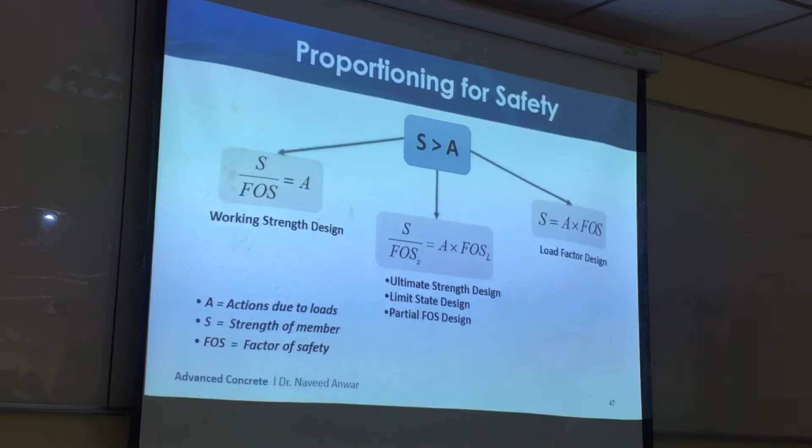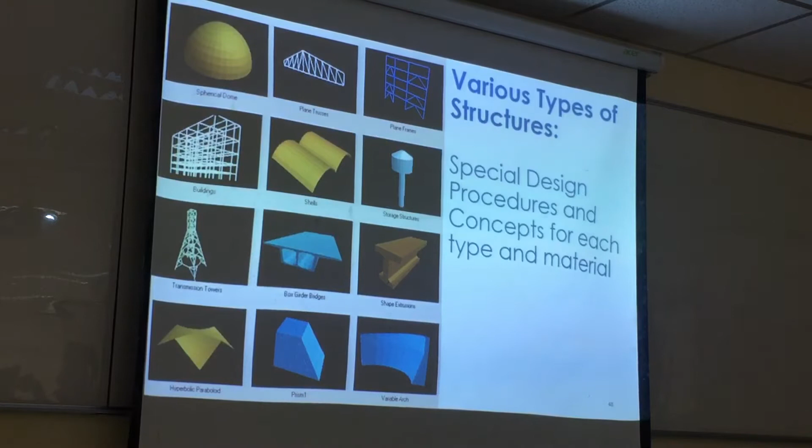Estimating the capacity we can now do better, and this course is about estimating capacity. So we are going to concentrate on this side of the equation, strength. Action will be the next course. These are the structures that you are supposed to handle when you go to the structural design office. So this knowledge should be sufficient to do that. So let's look at the structural design process.

Structural design is the process of proportioning the structure to safely resist applied forces in the most cost-effective and friendly manner. This is kind of my definition of structural design. So if you look at this definition, it has too many things in it. Very simple sentence, but many problems there. First of all, proportioning the structure. What does it mean? If you look at each word, you will find a deeper meaning.

Proportioning the structure. Not only dimensioning, but putting the members. How many columns will I need in this room? Where to place them? So it's also placing the members in the right way. Should I use a 5 meter grid or 10 meter grid or 7 meter grid? Should I use steel structure or concrete? So the whole concept of developing the structural system comes under proportioning. Type, spacing, size, direction, so many things.

So structural proportioning is a very complicated task. You need expertise, you need experience. Am I going to use a frame structure here, or a shear wall structure? Flat slab or beam slab? These questions are never ending. What system should we use? And that part is called proportioning. And then estimating the dimensions to start with, and then finalizing the sizes. So your major task is going to be proportioning of the structures.

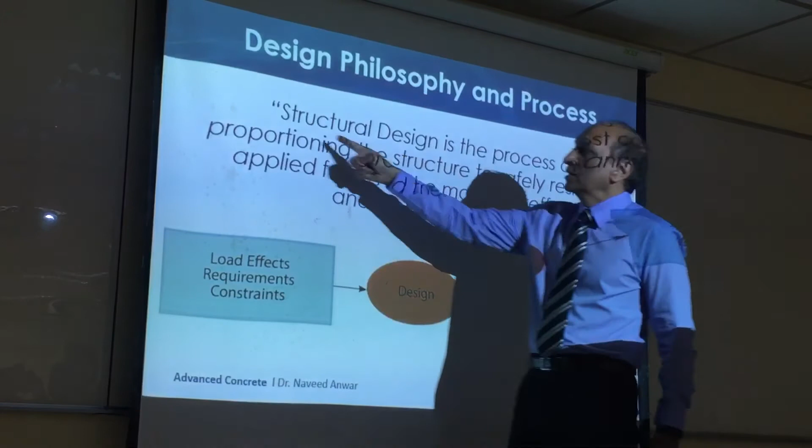Selecting the material type, selecting the material strength, selecting the column sizes, selecting the reinforcement amount, selecting the pattern of reinforcement. How many bars will I put here? This way or that way? Which diameter? Am I going to put stirrups or not? So your questions are never ending, and all are related to proportioning.

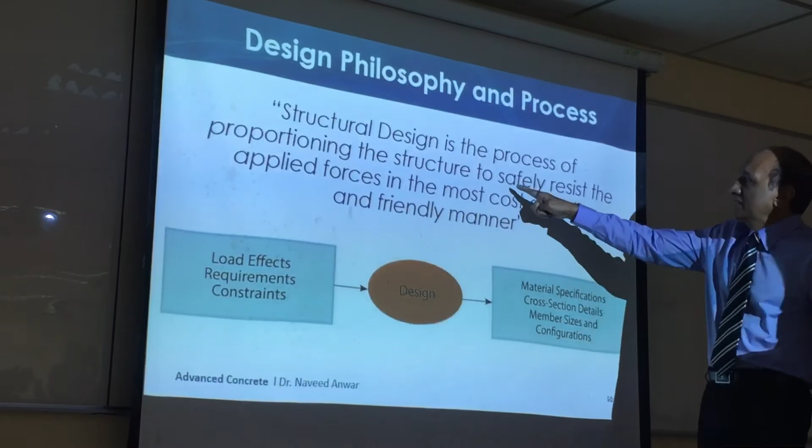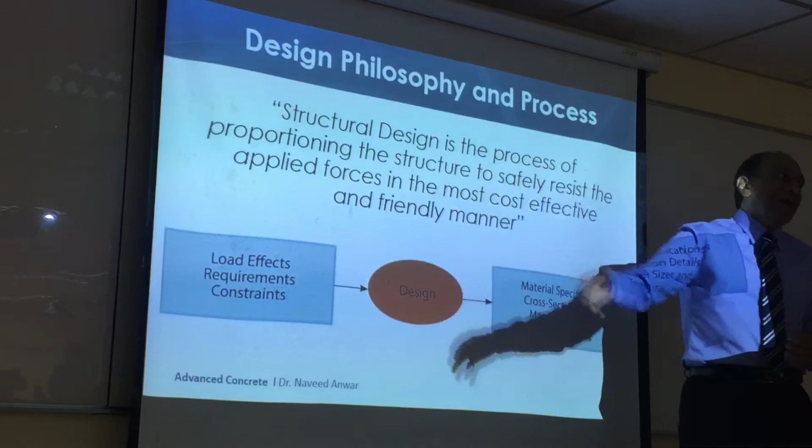And then why? To safely resist the applied forces, because we want safety. We don't want it falling down. People rely on us for safety, right? Engineered buildings are supposed to not fall down. So we need to make sure that we are able to calculate the capacity and the action and apply that equation. So first you proportion, then you estimate the load, then the action, then you calculate capacity, then you compare them and make sure that your structure is safe.

Most cost-effective manner. You cannot make something which is very expensive. Nobody will want it, right? Making it safe and too expensive, not good. You have to make it practical. You have to make it cost-effective. You must make it at a reasonable cost so people can construct it.

And friendly manner. What is friendly? Yes, environment friendly, comfort friendly, architectural conformance. Many meanings of friendly, right? And it should be aesthetically good also. Friendly for construction, for living, for environment, for eyes, for maintenance, for decommissioning, for operation. You should not make something that cannot be used effectively. So this is the definition of structural design.

So when you do that, you must take care of everything. But most of the time, engineers only worry about safety. So they come up with structures which are very expensive, or look very ugly, or have too many columns, because that's what they are taught. But structure is more than that. Structure is part of a system doing some function, so it must not interfere with the function. So please remember this definition when you become a structural engineer. You are a structural engineer, right? You already graduated.

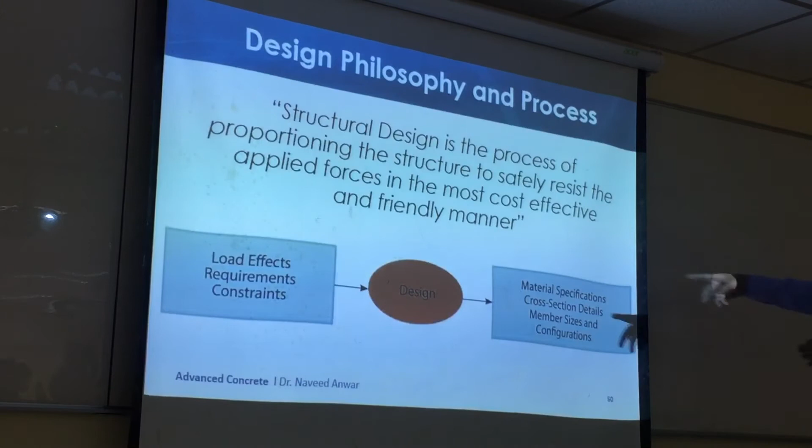A lot of engineers fight with the architects. They say, oh, no, I cannot do this because it doesn't follow the code. And what happens? The architects fire the engineer and they find another one who can do that. So never say no to an architect or a client. If they want something, say, yes, I can do it. Just give me whatever you want. Right? So never say no. Yes, we can do it. And then find a way to do it. And this design process is finding a way to do it.

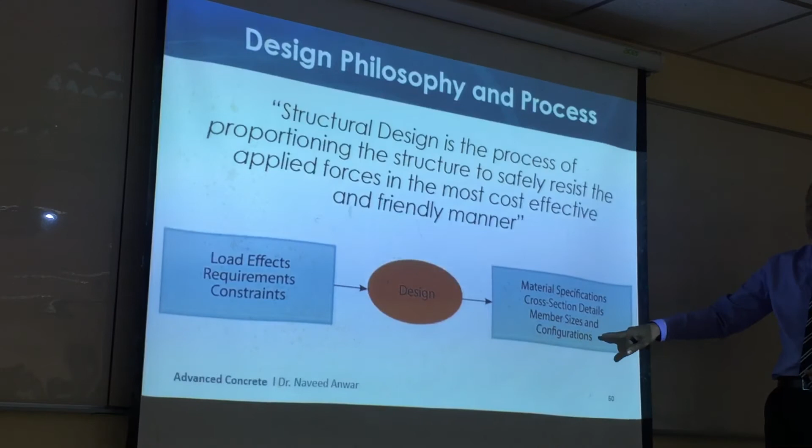In this process, you find a way to satisfy load effects, requirements, and constraints, put them together, go through the design process, and come out with material specifications, cross-section details, member sizes, and configuration, proportioning, which is everything.

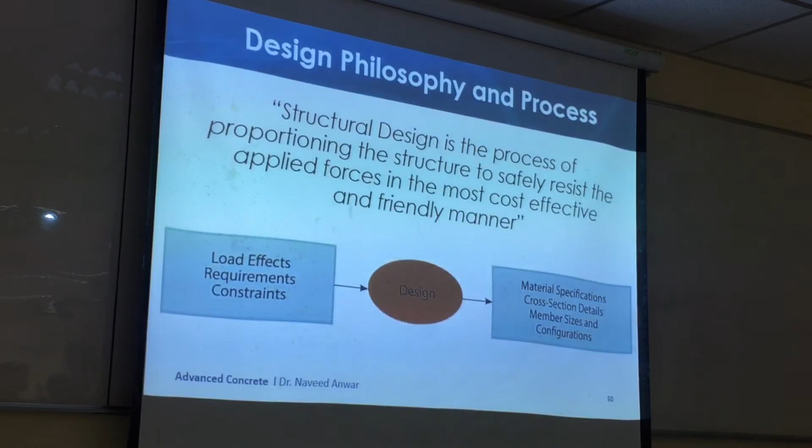So if somebody says, I want to have only one column which should support a 100-story building, you say, okay, sure, why not? I will design it for you. Give me a concrete which has a strength of 1,000,000 psi. If they cannot give that, you say, okay, not my fault. I designed this column for concrete with 1,000,000 psi. You cannot give me that. Not my problem. Bring me a material which has those properties, right? So my point is that you can always specify a material needed for something. If they cannot produce this, it's their fault, not yours, right?

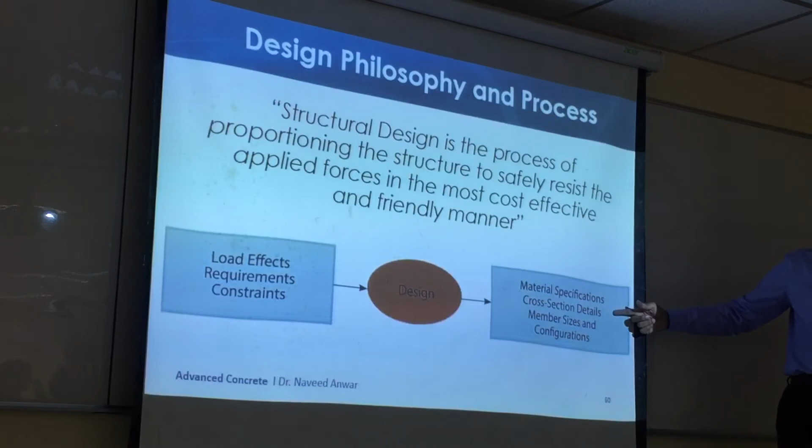Cross-section details, same is the case. Many times we get into a situation when the column size is restricted, we say, okay, we want to make it in steel and fill it with concrete, and then fill it with bars, and fill it with whatever. And if they really want it, they do it. If they say, oh, it's not, then we say, okay, make it bigger. So my point is that you should always have a solution for a problem. Then member sizes and configuration, how to arrange it. So this is the overall structural design process. Everything is within this slide, right? Anything that you think is not covered here, please tell me. Good.

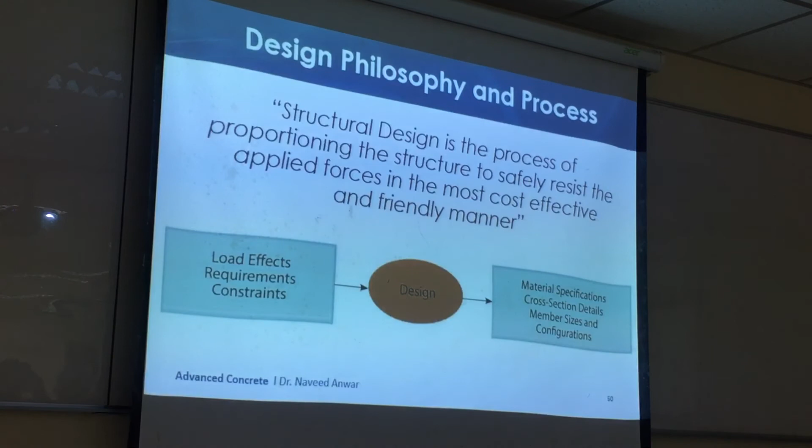So normally this whole thing, design, is carried out in these steps: conception, modeling, analysis, design, detailing, drafting, costing. That is the logical way we go. Conception means you make a concept, how you're going to do these things, the system development. Then you model it. Modeling means, as I told you on Wednesday, structure is too complicated, you need to create a model around that, simplify it. So a model is a simplified representation of the structure. You represent the structure, your concept and model, then you do the analysis. You take a computer program, you put this model inside, you run it, you get the response.

Then you design it. Remember designing, reinforcement, sizes, all of that. Detailing, how the reinforcement will be laid. 2 layers, 3 layers, spacing. What is the bend? What is the splice? Things like that. How it will be constructed. Drafting. Then somebody has to make a drawing.

You know, in America, in most places, the salary of a structural engineer and a draftsman is the same. So a lot of companies employ structural engineers to make the drawings also, because draft person and engineer have the same salary. So it's much better for the engineers to do that. So people have to learn drafting or detailing also in many countries. And then costing. Finally, you also have to do costing.

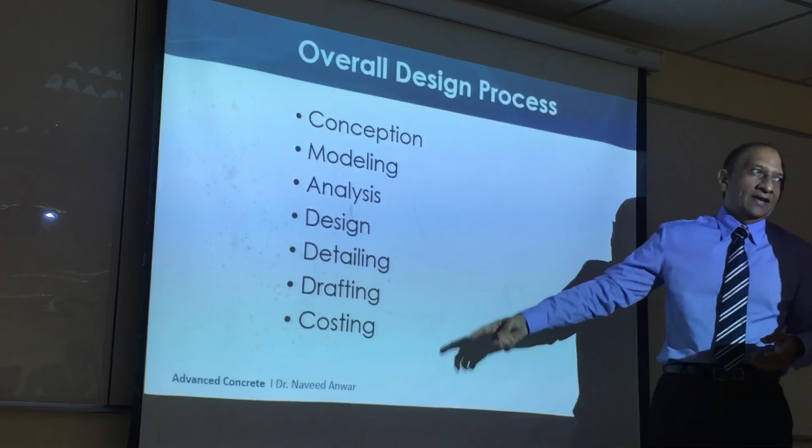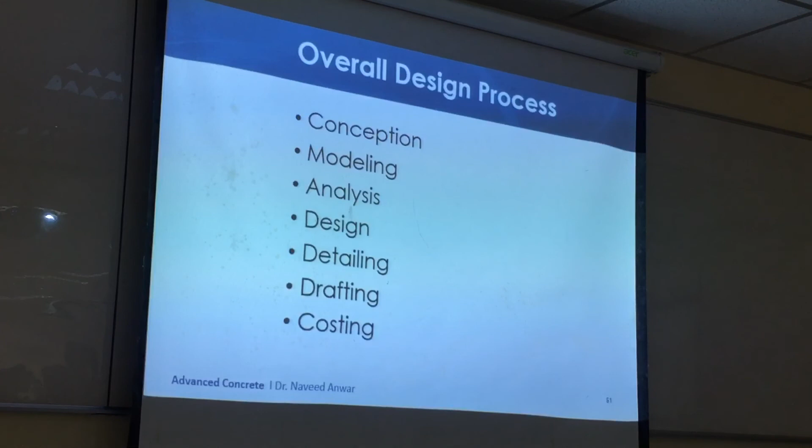But the problem is, this step-by-step thing never works in the real world. Because the client comes in and he says, okay, I have a building I want to make here. What is the cost of that building going to be? And if you tell him, please allow me to do the concept and then modeling and design, by that time he has already left your office. Because he doesn't want to hear that. He wants to get the estimate, things like that. So we need to learn a concept of integrated design, in which design can start at